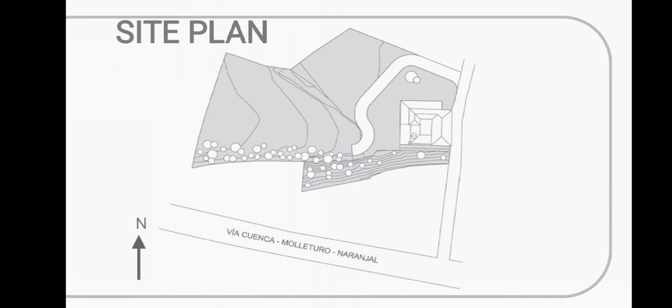The site is a residential area which was farming land before. The structure has a parking area for a maximum of 3 four-wheelers near the access road.

Landscape has been done in a minimal design format. The outdoor area is treated with grass and plants. Overall, the structure is designed so that it merges with the surroundings.

The restoration of the traditional Loma house by architect Iván Andrés Quizhpe is about salvaging the surviving structure situated near the farmland of San Joaquin in Ecuador.

Let's move to the structure in detail.

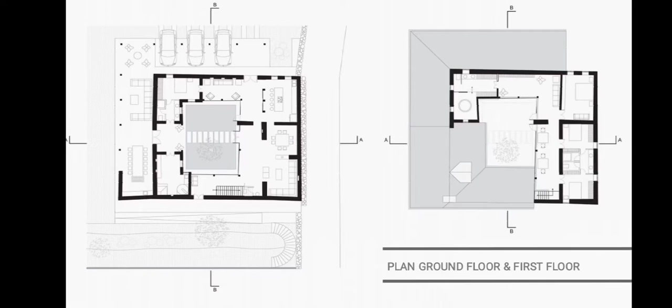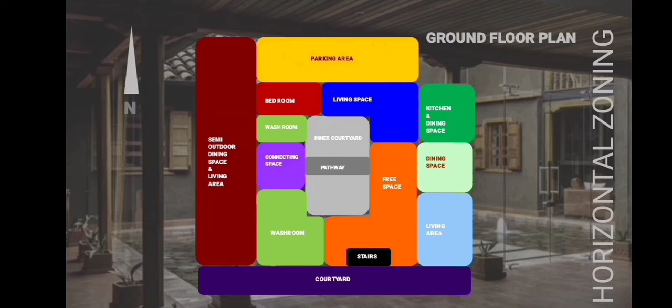The ground floor consists mainly of 13 different spaces: parking, courtyard, 3 living spaces, inner courtyard, bedroom, 2 washrooms, kitchen counters, dining, semi-outdoor dining, etc. are the main spaces provided on the ground floor.

The spaces follow a particular pattern, from public to semi-private to private, which balances both privacy and hospitality. The spaces are arranged so that the complete focus is concentrated on the inner courtyard.

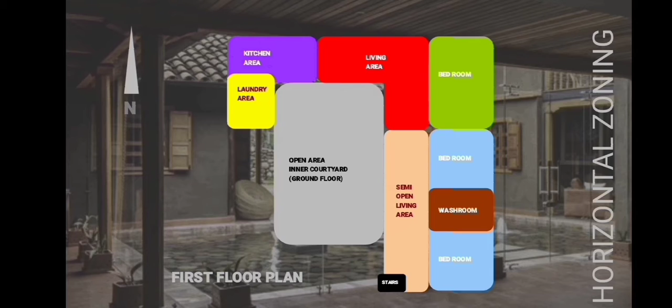The first floor mainly consists of 8 different spaces: semi-open living space, 3 bedrooms, 1 washroom, living space, kitchen counter and a laundry space are the main spaces incorporated in the first floor. The first floor is mainly for private utility.

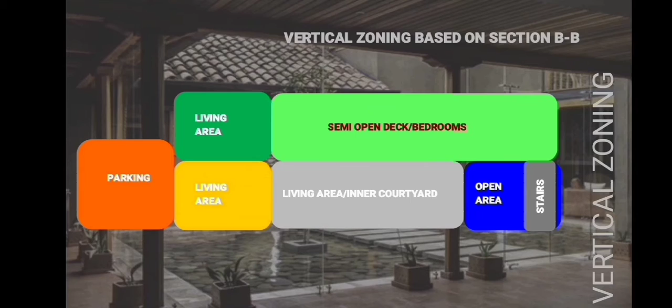The design is less attractive and gives importance to function over aesthetics. We may access the first floor through stairs provided in the ground floor free space. The alignment of spaces on each floor is in balance.

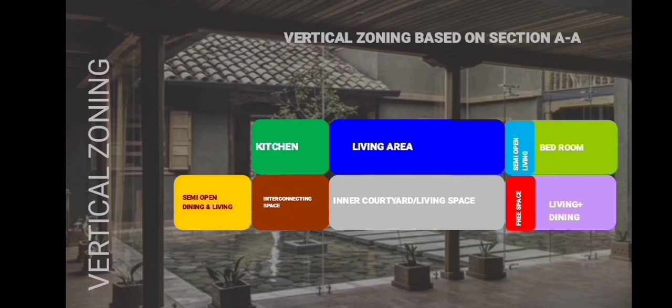As said before, in zoning, the inner courtyard is the main attraction of the structure. The parking is provided near the access road.

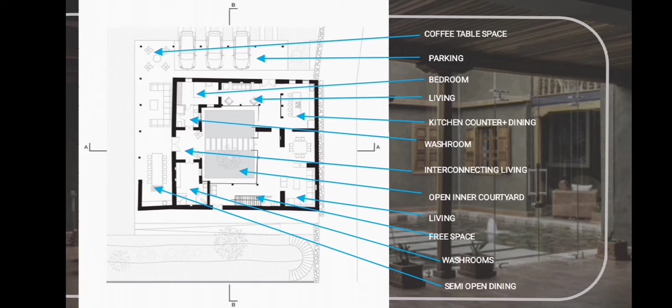Timber columns are provided to support the roof structure, and the floor is treated with stone and clay tiles. The interior spaces are also treated with clay tiles. Columns made of eucalyptus wood are provided around the inner courtyard.

Clay tiles are used for roofing. The walls are made of bricks and plaster. All these materials are very useful to keep thermal balance and make the space comfortable.

Ceilings are made of timber and straw. The inner courtyard is treated with outstanding landscape using pebbles and plants. The doors, made of large glass, provide good visual connectivity and a sense of openness.

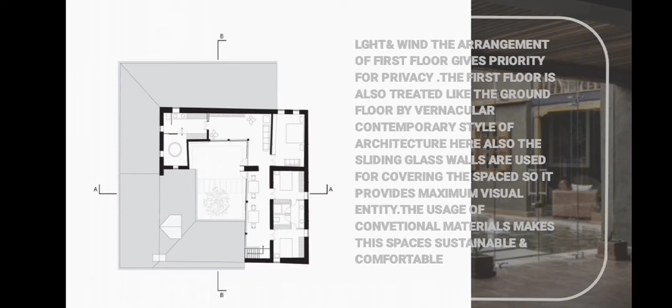As mentioned before, the first floor is not as welcoming as the ground floor. The structure is erected in a traditional design which is responsive to the local climate. The designers used sloped roofs and thick walls to prevent damage from heavy rainfall and snow.

Open courtyards are provided, which help keep thermal balance. By providing an inner courtyard, the designers could make ventilation and lighting effective. Glass doors are provided for better visual connectivity.

This structural design uses only minimal structural elements like beams and columns. Timber doors and windows are provided for washrooms and bedrooms for better privacy. The surroundings and spaces are integrated with each other by providing open spaces instead of four-side closed rooms.

Conventional materials like clay tiles, stone, timber, brick, etc. were used in construction. The roof is treated with timber, clay tiles and straw. The floor is treated with clay tiles and stone.

The walls are made of brick, stone and plaster. The columns and ceilings are made of timber. Some spaces like the kitchen and living room use steel to execute some functions.